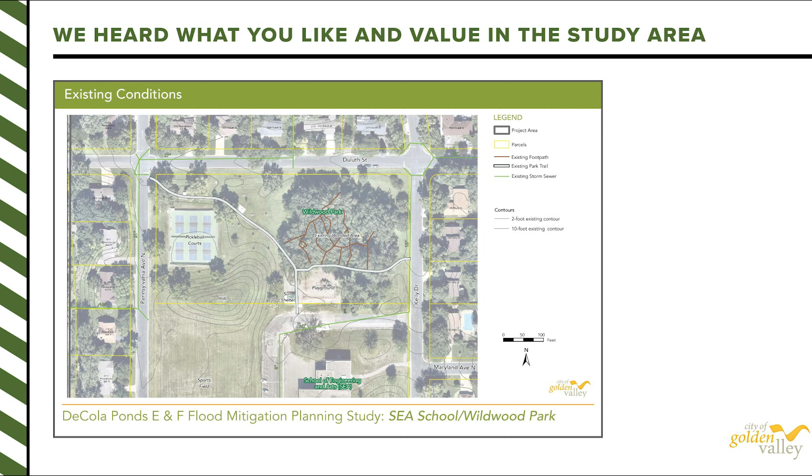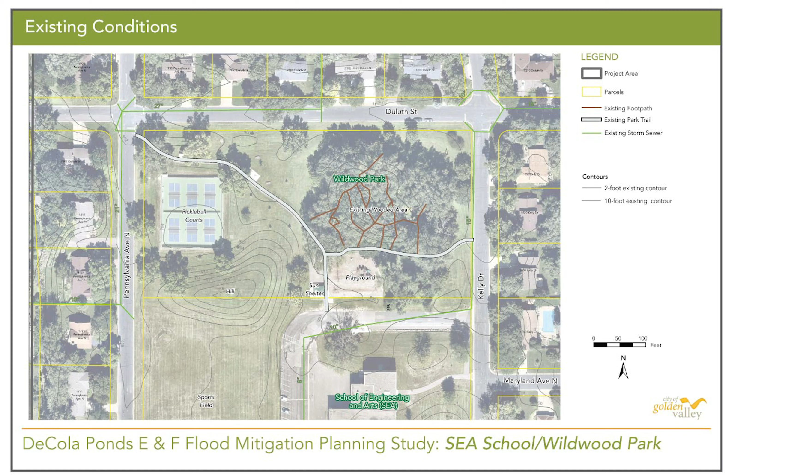All of this input helped to identify features in the park that the public values and uses regularly, such as pickleball courts, the playground area, the sliding hill, and the wooded area north of the playground. All of these important features are being preserved in the concepts that we'll look at next.

As mentioned earlier, the most valued features of the park are being preserved in all three concepts. The three concepts also show an expanded walking trail that will loop around the new stormwater facilities and connect to the school site and the potentially realigned driveway on Kelly Drive. Finally, the concepts include vegetation restoration with a combination of trees, shrubs, native grasses, and other wildlife habitat.

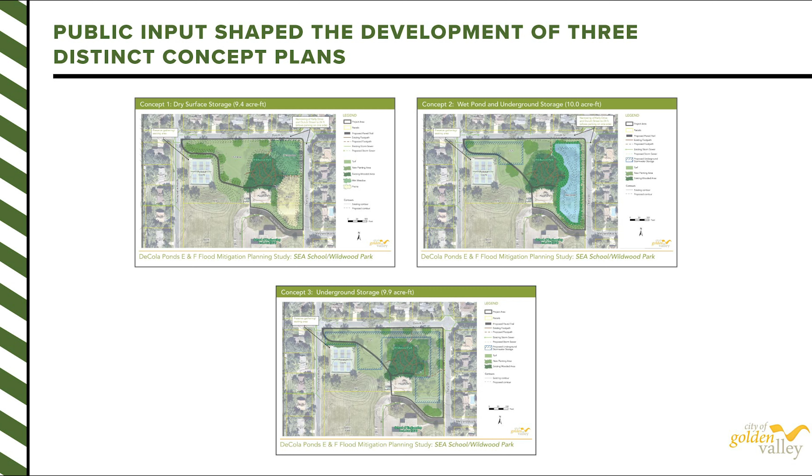Since this is a flood mitigation study, the project team attempted to optimize flood storage to achieve the maximum reduction in flood levels around DeCola ponds D, E, and F, with the goal of developing approximately 10 acre-feet of flood storage to benefit the surrounding neighborhood. Based on your feedback, the concepts include three distinct options for flood storage: 1. Above-ground dry storage. 2. Above-ground wet storage along with some underground storage. And 3. An all-underground storage option.

One thing to note as we view these concepts: although underground storage has the least amount of visual impact because it is out of sight below the park, it is more than double the cost of the above-ground surface storage options. Ultimately, one or more options, or even a combination of these options, may move forward for further evaluation in the engineering feasibility study set to begin this fall.

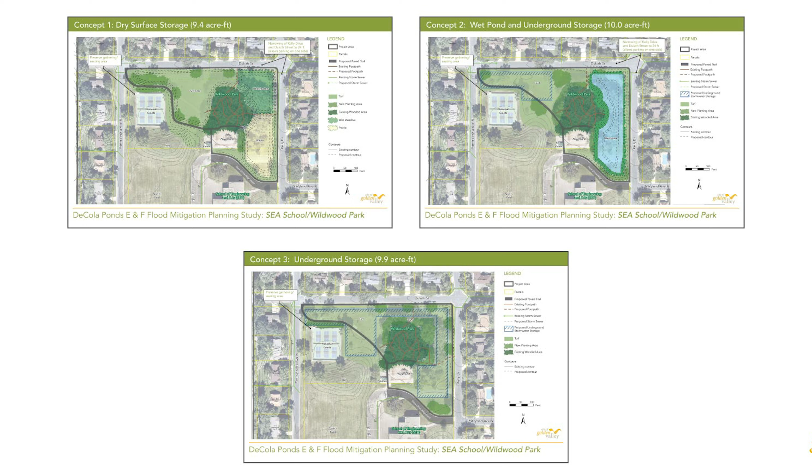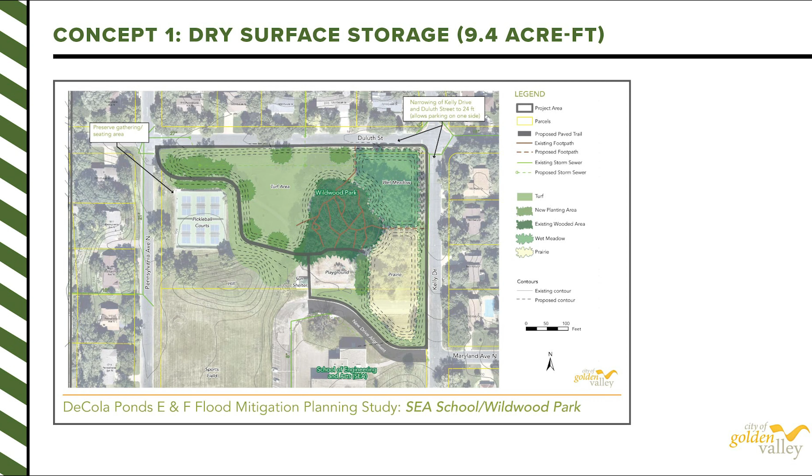Concept 1, dry surface storage, aligns most closely with the preliminary project identified in the long-term flood mitigation plan completed in 2016. This concept relies entirely on above-ground storage to lower flood elevations around DeCola ponds D, E, and F.

This option creates the most visual impact and change, creating a prairie, a wet meadow, and a turf area that are lower than the existing ground elevations we see today. These areas would be restored with different habitat types based on the frequency of flooding. For example, the wet meadow would hold water most often, while the prairie and turf grass areas could be designed to remain dry during most rain events and hold water during larger storms. The restored turf area in the central portion of the park could be utilized the same way it is today

when dry. To maximize storage, Concept 1 proposes a narrowing of Duluth Street and Kelly Drive adjacent to the project area, but will still allow for parking on one side of the street. Because Concept 1 relies entirely on above-ground storage, it is the most cost-effective of the three concepts, and generally aligns with the planning level budget put forth by the city and its funding partners, based on the long-term flood mitigation plan. Concept 2, wet pond and underground storage, creates flood storage using a combination of both above-ground and underground methods.

This concept includes the creation of a wet pond in the eastern portion of the park that can provide both water quality treatment as well as flood storage. In the northwest portion of the park, the underground storage system would provide flood storage, while the turf area on top of it would be restored at an elevation similar to what we see today. To maximize storage, this concept also proposes a narrowing of Duluth Street and Kelly Drive adjacent to the project area, and like Concept 1, would still allow parking on one side of the street. Approximately half of the flood storage provided in this concept would be underground. Therefore, this option is estimated to be about twice the cost of Concept 1.

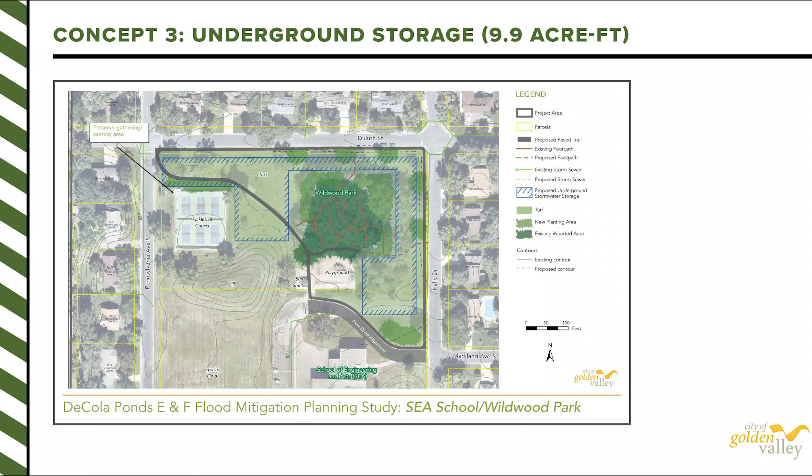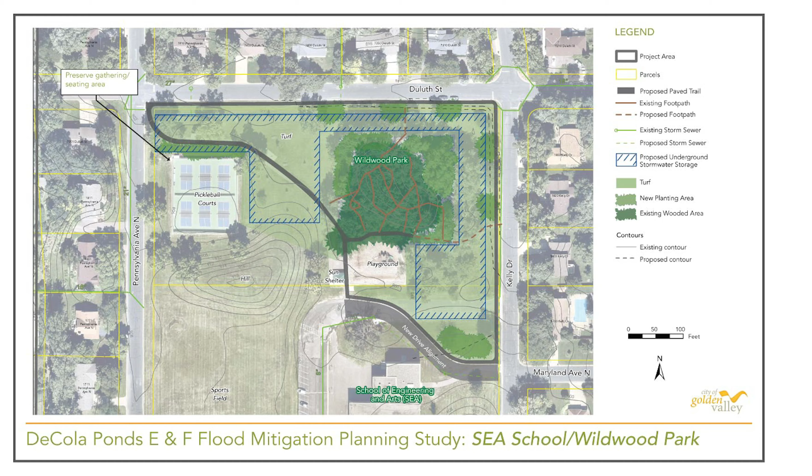Concept 3, underground storage, relies entirely on below-ground flood storage. This concept allows most of the open space in the park to be restored as turf grass and would appear the most like today's conditions. This concept does not require the narrowing of Duluth Street or Kelly Drive to achieve the target storage volume. With all storage provided underground, this concept comes with a significant cost, approximately 3 to 4 times the cost of Concept 1. Your feedback on these planning level concepts is important to the City of Golden Valley and its project

partners. As stated earlier, one or more options, or even a combination of options, may move forward for further evaluation in the engineering feasibility study set to begin this fall in cooperation with the Bassett Creek Watershed Management Commission. What we hear from you today will be used to help inform and refine the concept plans. Please submit your thoughts and comments by October 2nd, 2020. Include what you like or don't like about each concept, or any other questions or concerns you may have. A link to a form to submit your comments is posted on the project webpage.

The results of this planning level study will be used to inform the engineering feasibility study set to begin this fall. The feasibility study will be completed in partnership with the Bassett Creek Watershed Management Commission as part of its capital improvement program. There will be more opportunities for engagement this winter as the study progresses and the plans and costs are further refined. The watershed is hoping to wrap up the study in spring 2021. Thank you all for your time and for being part of this important planning process.